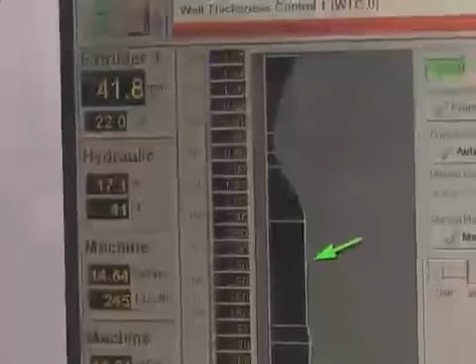Parison programming. Parison programming is the process of changing the parison thickness as the plastic is extruded from the die head. Programming can reduce the amount of plastic used, improve the wall thickness distribution, and reduce cooling time.

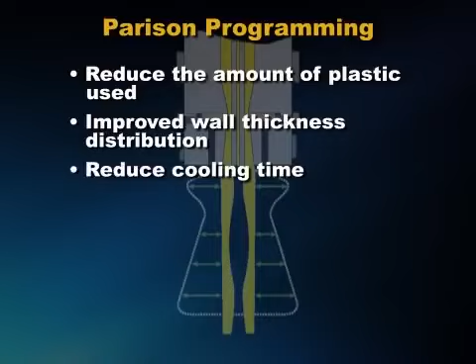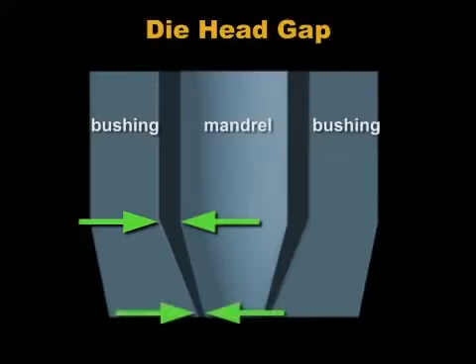In this die head design, the angle between the bushing and the mandrel are slightly different. The larger gap at the beginning of the land region reduces the pressure loss. The difference in gap thickness between the top and the bottom of the land region allows the programmer to vary the gap by moving either the bushing or the mandrel up and down while the parison is being extruded.

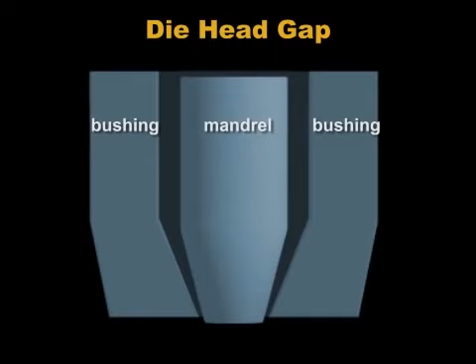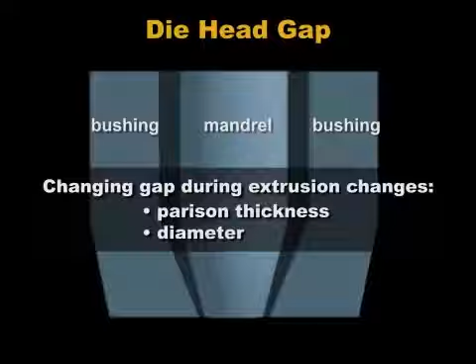Changing this gap during parison extrusion changes the parison thickness and diameter. The operator sets the control system to adjust the gap thicker in those areas of the blown container that expand the most, or thinner in those areas that expand the least.

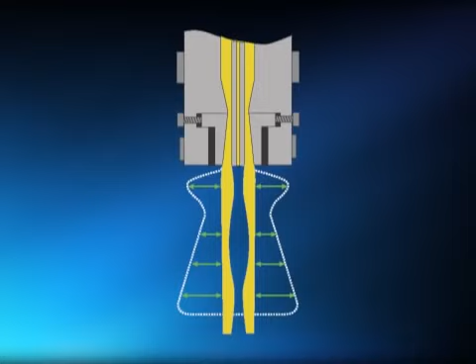In this die design, the land region of the die head can be either diverging or converging. In setting up the program controller, the operator must know whether it is the mandrel or the bushing that the programmer adjusts. The operator must know whether it is a converging or diverging die.

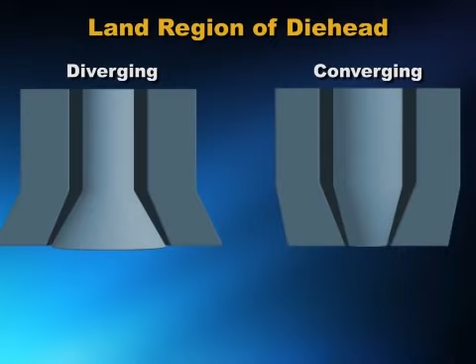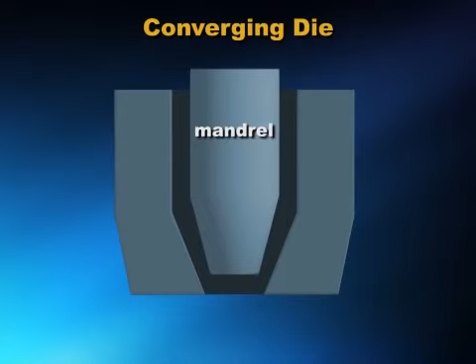If it is the mandrel that adjusts the gap and it is a converging die, raising the mandrel will open the gap. If it is a diverging die, raising the mandrel will close the gap.

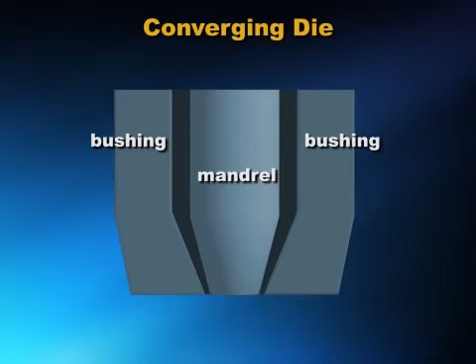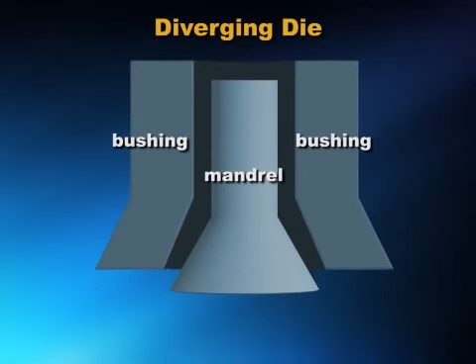If the programmer adjusts a movable bushing on a converging die, raising the bushing will close the gap. But if the bushing is controlling a diverging die, raising the bushing will open the gap. This sounds confusing, but for a specific die head, you will quickly understand which adjustment opens and closes the gap.